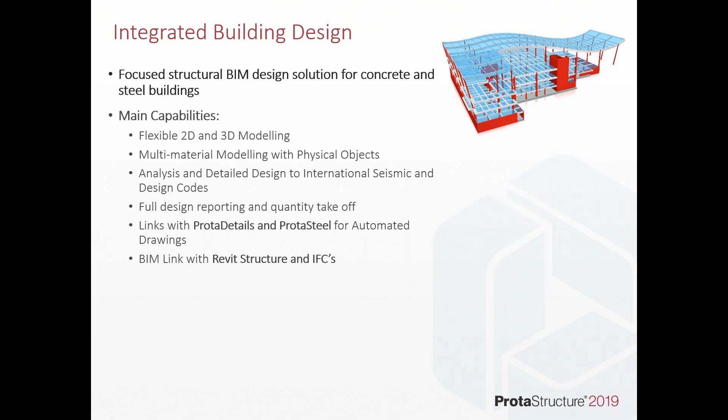Now today I'm going to take you through this brand new release of Prota 2019. Just before I start that, a little bit about this platform. Prota is really a structural BIM solution for concrete and steel building design. We work with physical objects to quickly create models, and then we automate the design of those to a wide range of different codes of practice. From the design, we then produce all the documentation automatically, so that goes from drawings down to calculation documentation, right through to producing BIM models that can be communicated with other platforms, including Revit and other programs that are involved with delivering BIM projects.

Our users like the platform, and often we get comments that it's very easy to use. But our key aim with the software is to help you become more productive and more profitable in how you deliver your projects, whilst retaining quality and professionalism at each stage. So enough of talking about this. Let's get into it, and I'm going to show you how this works.

So I'm going to come in and launch Prota 2019. And today I'm going to take you through a little bit about the software. So for those people who are new to Prota Structure, you'll get a feel for what we do within the platform. But I'm also going to touch on some of the new functionality that we've introduced with this release. Now, if you're new to the platform, there's quick start guides. We've got a lot of YouTube type video content available that you can watch now.

We regularly update the software and they're all delivered live. When you start the platform, you can start in a number of ways. Now, I'm going to just create a project here, and we might just call this Prota Global 1, and I can hit OK. And when we do start, we've studied different markets around the world, and we understand how you go about delivering projects in each of these markets.

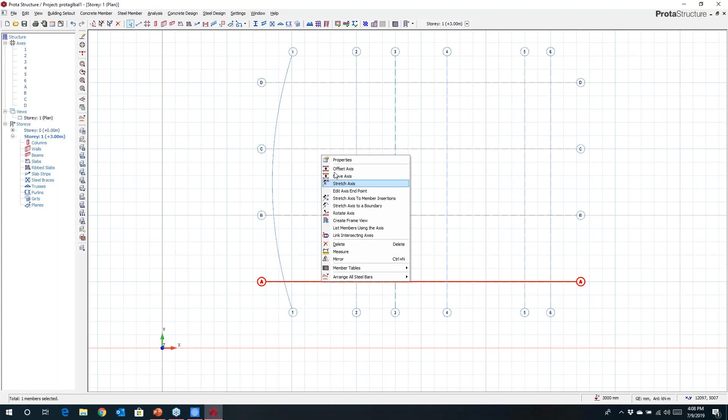These can be done. If you have grid lines which are unusual in set out, we see a lot of buildings these days which are not particularly regular. Maybe you've got a funny facade that the architect has come up with, and you want to create that, then you can use these grid lines to set out whatever type of unusual geometry that you might want to create. Once you're happy with this, if you just right click, you can create that geometry.

And all the modeling is dynamic, and I can just work my way from left to right here. I'm going to start by placing some columns here. I can box around to place columns quickly. If I have columns which are perhaps orientated a little bit differently, these can be set out, okay? And maybe I'd like to just place those along the curvature of that grid. They can easily be defined.

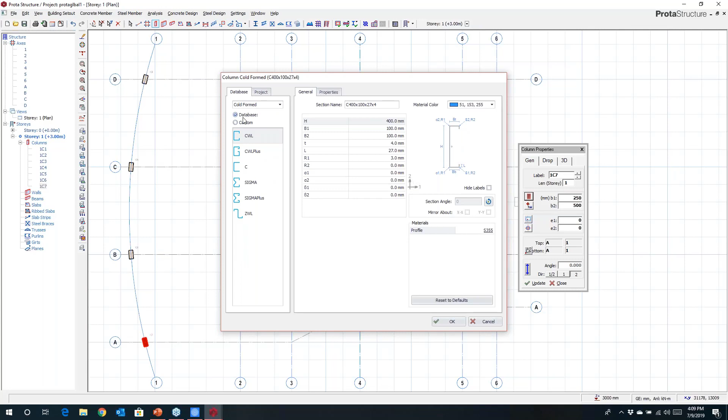Now we have libraries which will cover other types of profiles, common profiles that you might want to regularly use in buildings. They can be concrete, steel, different libraries here are set up that you can draw from. Maybe you've got built-up sections. Perhaps you have cold formed sections, and you can use a database, or you can create your own custom form sections. You can even develop composite sections where you have maybe steel encased in concrete.

So in here, I might want to use, say, a circular column. I can key the properties in. Underlying this, we calculate all the engineering properties for you, but then you can just grab this and start to use it within your model. So I can just box around here, and we can quickly create the objects in the model. I'm going to place some walls here, so again I can just click to insert these quickly.

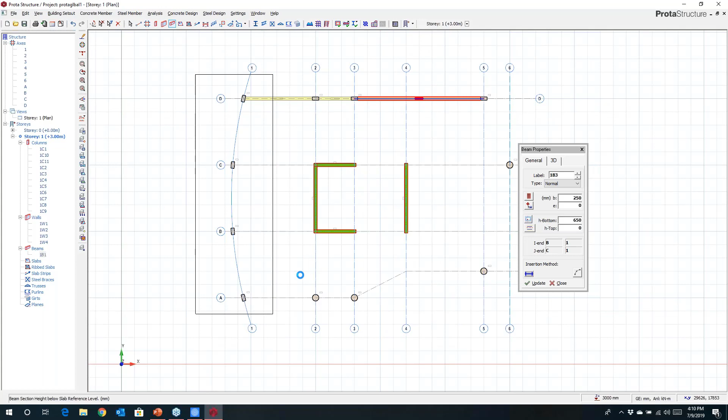Maybe at the same time I also want to create some beams. So again we can just use this to box around. We can feed the properties in, and then they can be created here. So I might create those curved beams. If I want to just snap to points there, I can come in here. Maybe this beam's going to crank and follow the curvature of that grid. Maybe I'd like to actually come in and create a curved beam. So all this is dynamic, and you can create this as you go.

If I have a lot of beams in a certain area, I don't have to go and click them one by one. I can just box around and they'll be created. We don't have to worry about overlapping. We understand that physical objects exist here, and when I pull these beams through, it's just putting the 2 extra beams at each end. Now for secondary members, you can just handily snap to points to quickly create them.

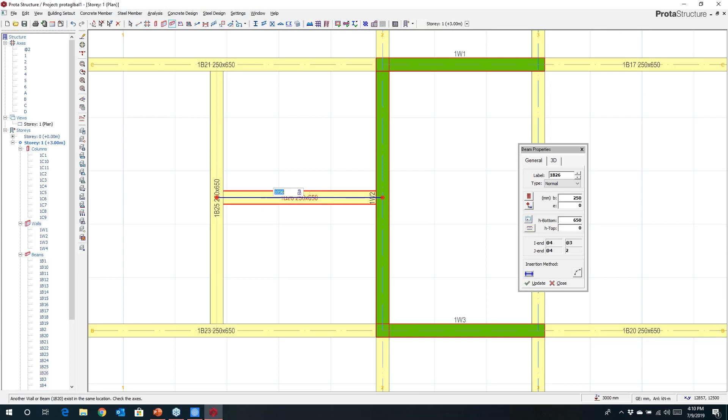If I want to put in beams at quarter point, third point, mid span, I can snap to these points. If I hit F2, I can type a particular distance in, and we'll pick up the exact locations there and other handy points. Now you can use your cursor keys just to move things around if you just want to adjust things quickly against, say, the architectural drawing.

That can be done. Maybe if I come down here, perhaps these columns at the moment might be sticking out the side of the building and I just want to reposition them. It's easy just to create this. You may even have situations where perhaps I want to fix the position of a beam. So we can use anchors here to do that. Later on, if you decide in the project that you might want to make a change here, perhaps the beam width has to increase, that anchor positions that beam in place and you can make adjustments. So that's very useful if you're just wanting to set things in place.

Now, before I put my slabs in, we actually have what we call load libraries here. We can use these to help develop finishes on a building very quickly. If I've got, say, a bedroom and maybe a bathroom, and I want to very quickly develop the way in which these are loaded, I can come in here and choose different colours to represent things. For, say, the bedroom, I'd like to key in the finishes. Maybe I have a screed on top of the floor. On top of this, maybe I have a parquet floor. I can key in the properties here, and the self weight of this is automatically calculated for us.

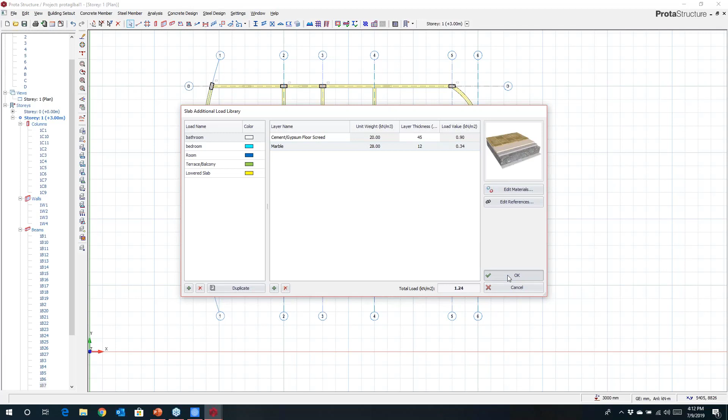Now we can have libraries of different finishes that we might want to typically use for both slabs and walls, and we can build up these loads. If I go to the bathroom, the screed thickness might be a little bit thicker. Perhaps on top of this I've got a marble flooring. Again, we can define these and that self weight's calculated. Now the advantage with this approach is that later on, if the architect changes his mind, which often happens, you can just come in and edit this. Everything within the building can update. You don't have to go and individually tackle changing 500 slabs if he's changed his mind.

So when we come to define slabs, we can just come in and choose from the finishes here. So I'm going to grab, say, the bedroom. If I'm not sure about the live loading, this just links to the code, and we can just choose those values, and then we can place our slabs in the building. Okay. I may have my bathroom. Maybe in this situation, I just want to key the live load in. I can easily do that. So we can just run around and create that. Of course, you can key any of your own finish values in as well. We're not constraining you. It's entirely up to you what values you would like to use here. So I can just run around the edge here, and we can place those elements within the model.

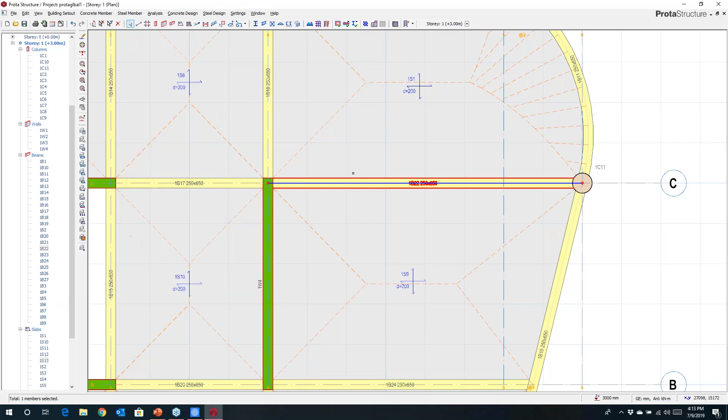Now, what you may notice here is that we've automatically worked out the yield line here. If we right-click on a member and come to edit member loads, you can see the distribution of dead and live load. All this is being automated for you. You don't need to worry about calculating this yourself. If you do want to use other distributions, maybe you want to mesh the slab and use a finite element distribution here, you can. This very accurately transfers the weight from the slab to the frame members for you.

Now, if you have other shapes, maybe I've got an unusual balcony, maybe the architect wants to define something a bit freeform, we can use sketch lines to help create these. Okay, we can then come in and use those. Maybe I want to grab the properties of that slab and put a slab in, maybe it's 150 thick and I'd like to drop it 100.

Okay, we can just come in here and take advantage of that to define that unusual shape. Now, before we get too far on this project, and you might just see that this is starting to look like a key plan, we can start to interrogate things.

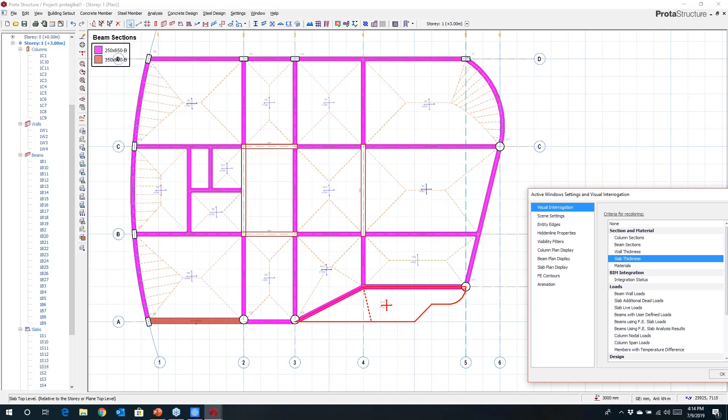So I'm going to look here. I maybe want to look at what column sections I've used in my model. Maybe I want to check what beam sizes I have, and you can see I've used a couple of beams so far. My slab thicknesses, again, we can just review this. I may also want to look at the loading that I've applied. So my superimposed dead load, my live load, all this we can interrogate before we get too far on the project. Okay. So if I'd just like to quickly review things before I get too far on, that's easily done.

Now I'm just going to touch on a few of the more advanced things that we have in here, just to give you an idea of the flexibility that the system has. So I'm going to move into my columns here. I've maybe traditionally just used a standard shape here, but maybe the architect's got something a bit more challenging, and I want to create a different type of column section. I can come and sketch this out. Okay. In the software now, we can automatically contain these types of shapes, and it will propose to you an arrangement of bars. All these you can work with.

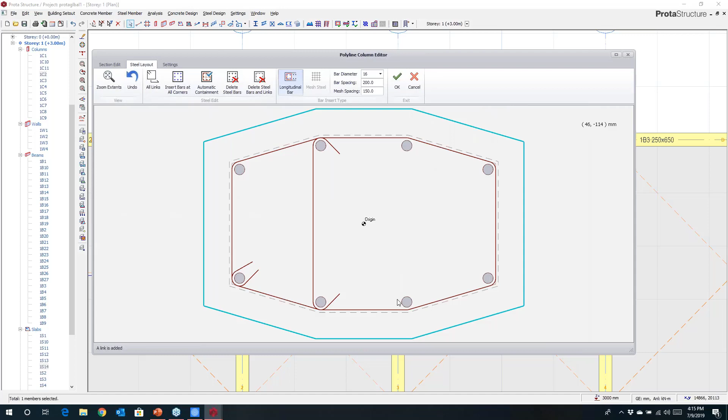So if I decide that maybe for this column shape, I actually want to create some additional containment steel, I want to use this as a template for my design, I can run around here and just come in and create. So if I wanted to add some extra bars here, okay, around the perimeter there, maybe I've got some perimeter bars I want to add in, okay. We can take advantage of driving containment for any shape column we like, and we can then use this as a template for the design and detailing. So if I hit OK, that's then set up. We can then use that for design.

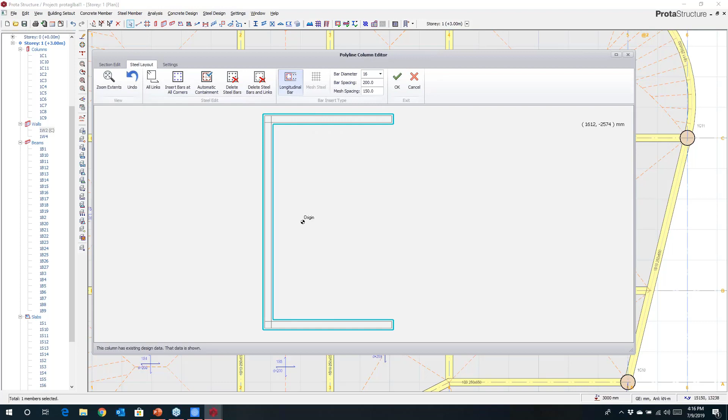Now, we can also do the same thing with the walls. In fact, we can come and merge these, and if we right-click, we can go back to Polyline Column Editor, and you can see here that I've got now that wall profile. Now we've merged these walls into individual panels, and again, we can ask the program to automatically try and contain this for us. And you can see here it's automatically providing all the containment reinforcement around the corners. It will provide the detailing in here.

If you want to add extra ties and so on in here, you can. It's entirely up to you. Okay, and you can use this for then design and detailing. It's up to you. If you don't want to do that, of course, you can just design them individually. The choice is yours as the designer.

Now you'll see here that I've been creating a model in plan. At this point in time, I may want to just come and show you this in 3D. You can look at the view here of the model within 3D, and I can look at different views, and I can tile as many windows as I like to look at different parts of the model here.

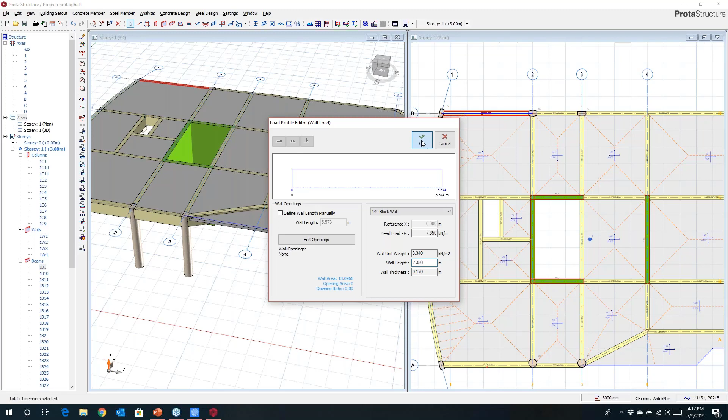Okay. Now, at this point, I might want to come in and start to assign some other types of loads to the building. I'm going to put in some brick wall loading. So again, I can draw from a library, a little bit like the slabs, where we can set up different types of brickwork, and we can type in the height of that, and then that loading is automatically created on the beam. Now I can copy this loading, and we can replicate this easily around the edge of the building. So if I just copy this externally around this, if I right-click, we can then paste these to these other members, and you can see here that brick wall load is automatically set up.

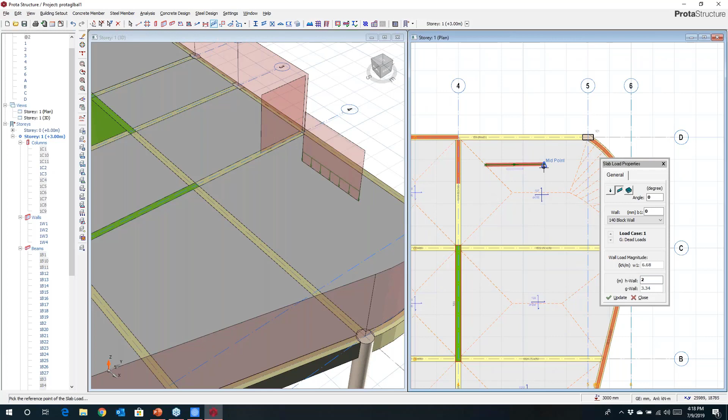I may have other types of loads that I want to assign. Perhaps I do have a wall load sitting on top of the slab. So again, we can just key in the properties here, okay, and we can come and define that in the model. So if I wanted to place a wall directly on top of the slab, you can see these have also been created at the same time.

Within a building, you'll have things like services running around, and you may want to create and position different openings to cater for those. The beauty with working with a physical model is that they can easily be adapted. So if I pick this up, I can move this around, I can place this wherever I like.

If you have other types of set downs, perhaps you've got a bathroom, or maybe you've got part of the building which is a little bit different, you can just come in and create this. So if I just decided that in here I wanted to create a drop in the slab, I can easily come and define that within the model.

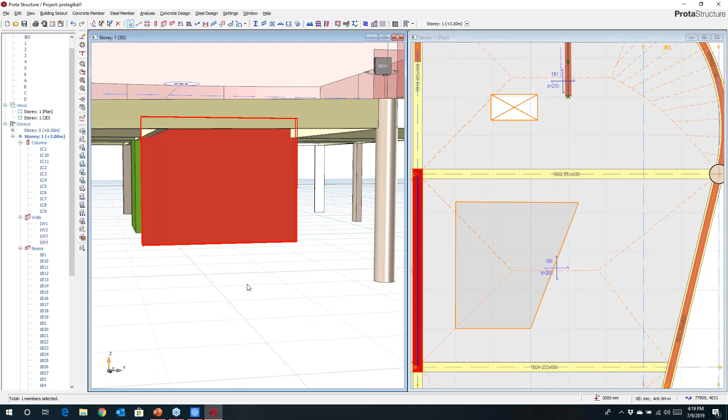Last thing I'll touch on here is if I come to the walls here, similarly, if I right-click, we can come in and insert openings in here. Maybe I have a window. I could even put the weight of glass in, depending on how accurate I want to be. All this can be considered within the model. So that just gives you an idea. I've just created a simple floor.

At this point in time, I may want to take this, and I'm going to just come in and insert some floors. So let's just say this is a 5-story high building. Okay, and I'm going to take that floor and I'm going to come and generate this information up. So I'm going to copy that up a few stories there, and you'll see that this is just replicating up the building. Okay. Now once you've got this in, it's all editable.

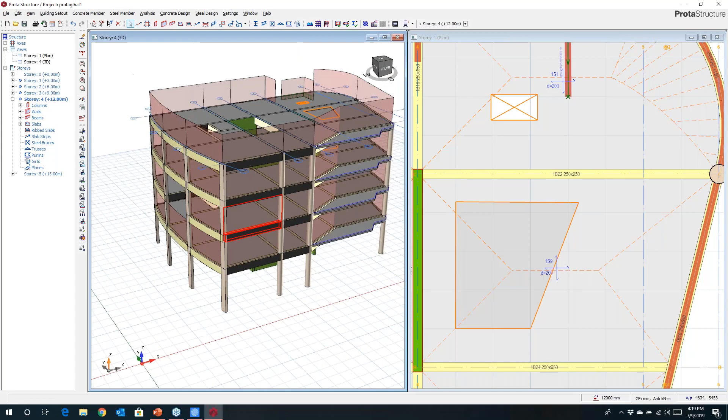So if I want to make changes as I go, perhaps I'd like to remove those beams there, I can. Maybe I'd like to reconsider the structural system at the top here. I'm just going to come in and grab all the beams. So if I just come in and use the filter button there, I can select all the beam members there at the roof, and I might get rid of those, and we might want to work with a flat slab. So you can see that I've just quickly changed that from a beam slab system into a flat plate. Okay, it's easy just to come and adapt and modify the model.

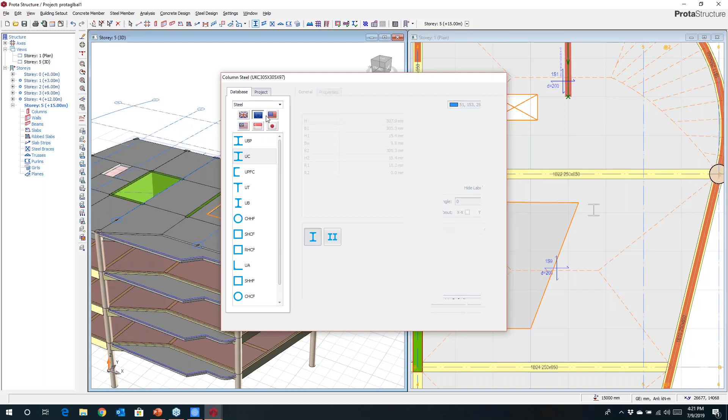At the roof here, I'm just going to touch on some of the new features that we've got with steel modelling. So when you come to create steel elements, you have libraries here of different sections, and there's a broad range of different sectional databases you can choose from. I may want to use a UC column, and I can just grab something that I might want to start with, and then we can place this within the model. Okay, so you can model in either 2D or, as I am doing here, position things in 3D, and you can see that those columns are quickly created.

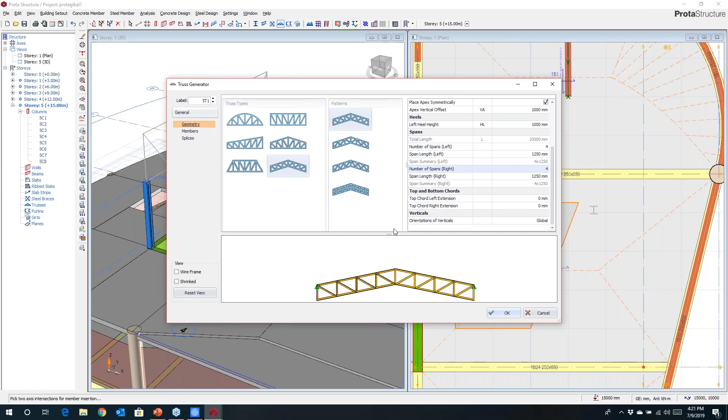At this point, maybe I want to come in and create some trusses. So again, I can just snap to points within the model, and you can then come and preview different truss shapes. So you can come and choose the appropriate type of truss that you might want to work with. Okay, these can be aligned the way in which you like. You can easily come and adapt these. So if I want to have 4 bays each end, or different truss configurations, I can.

The members are grouped, so it then becomes easy to edit. So in this situation here, I've got diagonals there. Maybe I want to change these to tubular or square, or maybe channel sections, I can. If I want to use back-to-back angles, I can also do that. So it's easy just to come and adapt and make changes globally to those elements within those groups, and they're set.

If I just remove the verticals there, this makes the placement of that easy. I can also set up splice positions as well for the connection design. So if I hit OK, that truss then is created. That then becomes available for me to use elsewhere. So I can easily grab this and copy this across the structure.

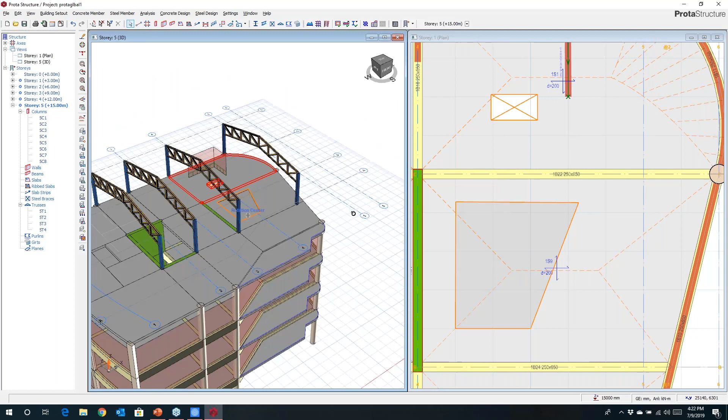I can then start to just work on this roof level. So I'm going to also place at the same time some beams. Let's just grab a beam section to start with, and then I can choose fixities and so on within the beam. I don't need to draw them one by one. We know that the columns are there. The beams will be automatically split as I draw these. Okay, and there you can see that those beams are created.

Now you'll notice here that the snap points are dynamic, and you can snap to any part of the model that you like here. So I'm just going to come in and tie these frames together. Let's just tie these beams together at the top, frames together at the top, and they're done.

I'm also going to place in this model my purlins. So let's just grab the 2 end bays here, and you can see here that it's proposed an arrangement for the purlins. Okay, it's set these up at nodal points, intersections with the truss. So it's trying to use some intelligence with how it does this. You can adapt this if you wish.

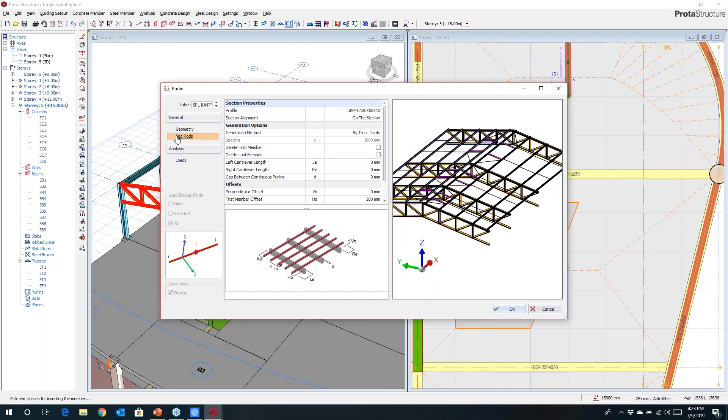What you might notice with this version is that we also can model the joists or the sag rods, and if you don't want to have these in, they can be removed. You can also assign loads to this. You can change member sizes if you want to use different sections in here. These can be adapted at starting point. And if you just hit OK, then that will be created in the model.

Now, I can also click on elements. So if I wish to create between those 2 columns, maybe I'd like to set up a brace. You can just choose these elements here, and then you can see that a brace is proposed for you. Now there's different types of braces in here that you can choose from. You can just come and set this up to suit. So it could be a diagonal brace or maybe even a K-brace, it's up to you.

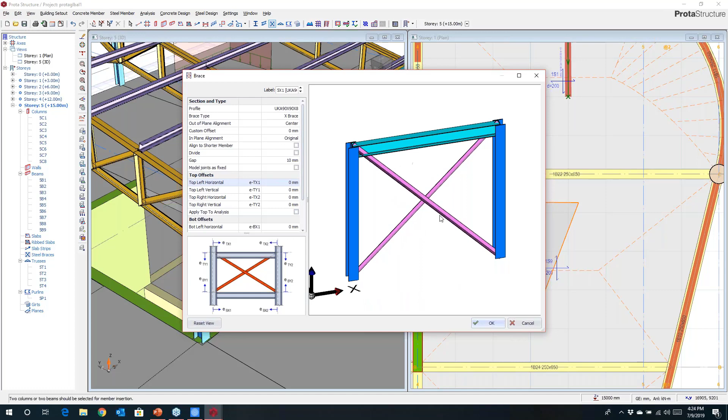Now the bracing positions can be manipulated. If you wanted to move a brace by 500 or so on, you can see there that the analytical wire is kept where it is. If you don't want that, if you want it to align with the new position, that can easily be adapted here. If you want to make any adjustments here, these are dynamic, and you'll preview what we're going to create before we create it. So if I hit OK, that can get built.

You can model in different planes. I'm modeling in the plane of the roof there. We can easily come and create these. If you want to click on different elements here, these can be easily set up. Now I'm going to just finish this off. Let's just place my girts. And again, I can key in the spacings here. If I don't want to see sag rods, these can be turned off. And then if I hit OK, then my girts will be created here.

And the last thing I'm going to do here, let's just place these external ones on this side as well. I could put the internal ones as well if that's what I'd like to do. So at this point in time, let me just save the model before we move on. Now, the important thing with what I've done here is that the purlins are sitting directly on top of the truss. The girts are on the face of the column. The bracing's in the plane of the column.

So what we're doing here is we're setting out things to suit the way that this may be constructed and fabricated. Now that's very important when working with ProtaStructure, because at the end of the day, what we want to create from this is detailed documentation, all the drawings and all the detailed design we want to drive from this physical model. So at this point in time, I'm going to now move into looking at the analysis and design.

When we select the analysis button, you can see here that a range of codes is presented. In this release, we have introduced the American codes of practice. So you've got ACI code. There's also other international codes available: British standards, Eurocodes, Turkish standards, Hong Kong, Singapore, and there's other localizations in there that you can choose from.

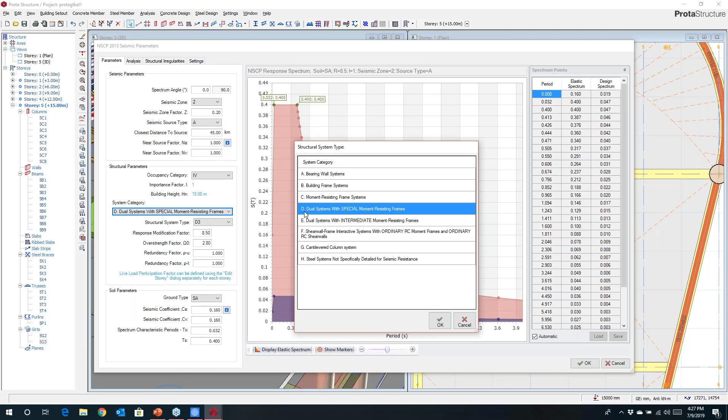So I'm going to look at the seismic parameters here for this building. In here I can come and choose my seismic zone. It could be zone 2. This is in the Philippines. Seismic sources can be identified. We can also come and choose occupancy categories. This just follows the code. You'll just choose what type of structural system you're using. I might be using a dual system with a special moment resisting frame.

I can also choose the type of frame. It might be composite steel and concrete, concentric braced frames. Response coefficients, overstrength factors will all be assigned here, automatically done for you. You can also choose your soil types depending on where you are, and if it's a soft soil, you can see that this is adapting. The spectral curve will adapt to suit those soil profiles. Now, of course, if you have your own data, if you want to type it in, create it yourself, this can easily be done.

Now, I can choose a number of modes I want to run. Damping coefficients can be applied. Eccentricities are automatically worked out. We also do some quite sophisticated checks to check for irregularities. And these can be very tedious if you have to do them by hand, but torsional irregularities and elevation irregularities are all checked by the software, and we will automatically make modifications to the analysis should these exist.

In addition, we're also doing some very detailed seismic checks. So we will check for wall frame interaction, second order effects. We will check for strong column, weak beam, and we will also get into the detail of checking joint shears. Now, if you've done that, like I remember as a graduate engineer in New Zealand, it's a very tedious process and very time consuming to make sure all those bars fit. So we will perform all these checks automatically for you, and there'll be detailed documentation provided with that.

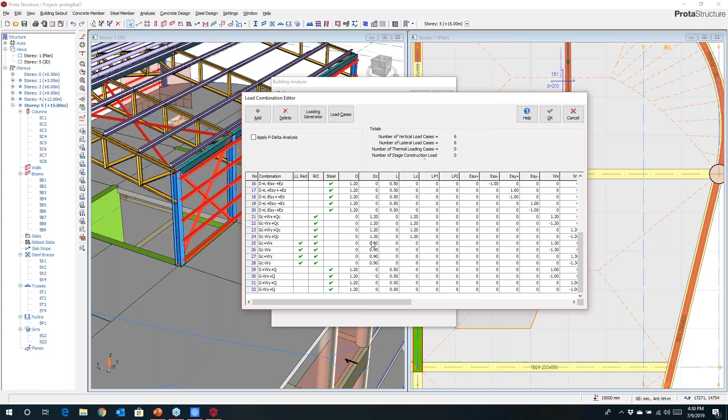So if I hit OK, all the combinations will automatically be set up for me. These factors can be edited. You can make changes in here if you wish. If I hit OK, then they're done. Now, we also introduced automated wind loading in this version, so you can key in basic wind speeds.

We will automatically populate different data, the geometrical data, into this. You can choose different exposure categories, and roughness can be set up to suit. This is following the American standard, but you also have British and Australian codes. We also have European standards in here as well. We will then automatically work out the pressures as well as the loadings being applied. They just get applied to the structure and they're automatically set up for you.

Now you can customize material bars and grades to suit the way you want to deliver the project. So if I don't want to use certain bar sizes for certain elements, these can be customized. You can set up different grades of steel and concrete here just to suit the project. So all this is customizable, and you'll do this when you're getting a job established.

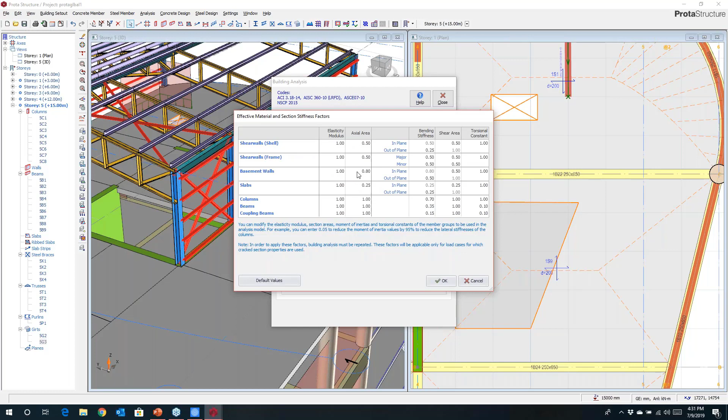Now the cracked section properties are highlighted here. You can define different properties for both shell and frame shear walls. We have a new basement wall object which can have different crack section properties from shear walls. We've also introduced coupling beams, and you can also play with these properties if you wish. So if I hit OK, they're set up.

Now I'm going to move into run this now, and I'm going to use rigid zones. I'm going to actually build out rigid arms within my beam column joints. I can also choose to mesh my walls, and you can define different meshing parameters here. I can also choose to mesh different floors within this building. Now I had a flat slab at the roof there. This roof level, I'm going to choose to mesh that, and I can play with the parameters there, and the stiffness parameters, semi-rigid membrane and so on can be set up here.

Now the analysis is just a button, and at this point in time I can just hit go, and what we're doing now is that we are going to take this physical model and automatically build the underlying intelligent analytical wire. So as I've been going, I can assign different fixities to members. I've set up my load combinations. The load distribution is automatically being performed. And then we can move in and take this and build the analytical model.

Within this version of the software, we've introduced a new 64-bit enhanced solver, and this allows us to run much larger projects much faster. You'll see this is just about to kick off, and we're now running through the analysis process. You can see here as it's progressing through different stages, these are all documented, so you can see how this is going. We will do checks, so you might realize when I created this model, I actually have a column sitting on top of the slab. We'll interrogate the model, make sure that everything's okay, that there aren't any issues, and then we will carry on with the design. It's now prepared all the data.

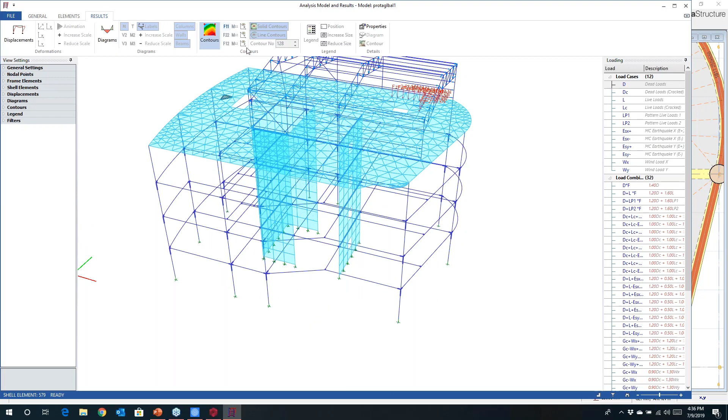So if I look at the model here, we can selectively choose what we want to mesh in the building, which is what I did, and I can come and choose to look at these different contours here. You can see contours, and you can start to look at different forces in the model. So if I wanted to look at, say, axial load, and I'd like to know how these loads are changing as I'm going up the building, this can easily be reviewed. You can filter out different parts of the model.

If I just like to look at perhaps a particular floor, maybe it's story 2, and I want to look at that in a bit more detail, I can just highlight that, and maybe in here I'd like to look at the shear, or perhaps I'd like to look at the bending. All this can be interrogated within the model. I may even want to be looking at seismic load cases just by themselves, or as part of combinations. They can all be easily reviewed here, and we can interrogate these.

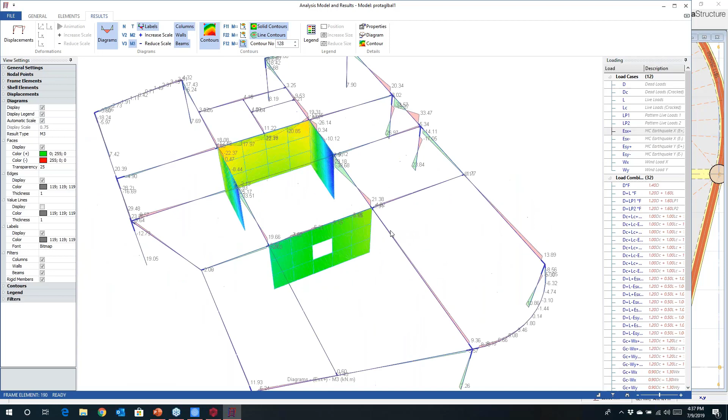Now, we do make use of rigid zones, and you'll see that we've actually built out rigid arms from the beam column joints here, and these allow us to look at more efficient design. We're more accurately looking at the stiffness of the beam column joints and frame interactions, and this will then lead to a more economical design and approach to your frames. So if I'm happy with that, we can then move in and look at the design of the structure here.

I can just click on a column, and we can look at detailed checks for this column. It will highlight to you what is critical. In this case, it's actually just a gravity case. We can look at interaction diagrams, so we can see capacity plots here. Axial limits, seismic limits, and so on will be specified, and you can see the interaction diagrams. You can also look in detail. We will iterate to work out the neutral axis. We'll work out the most efficient way in which the structure can be designed, and that will all be documented.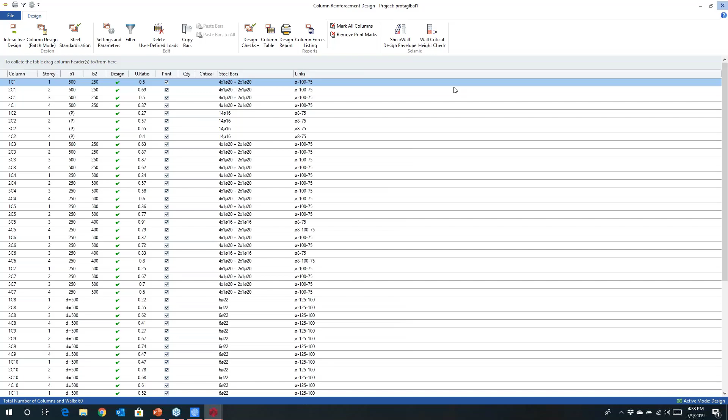Similarly with our beams, if I just click on a beam, we can just come in and look at this in more detail, and we can look at the arrangements here. We will automatically select the arrangements. You can look at diagrams here. What we have done with this release is that there's these new diagrams which are dynamic, and you can see I'm looking here at the shear force and bending moment diagrams.

If I'd like to look in more detail, let's say my deflection plots, I can. These are the envelopes. If I wanted to look at dead load cases, or perhaps my seismic cases, or perhaps different combinations, you can just easily navigate through these, and these will adjust. And obviously we're then enveloping these for the design. Now with the new enveloping, this provides for much faster grouping design, as well as general enveloping. It also allows us to interrogate diagrams much more closely.

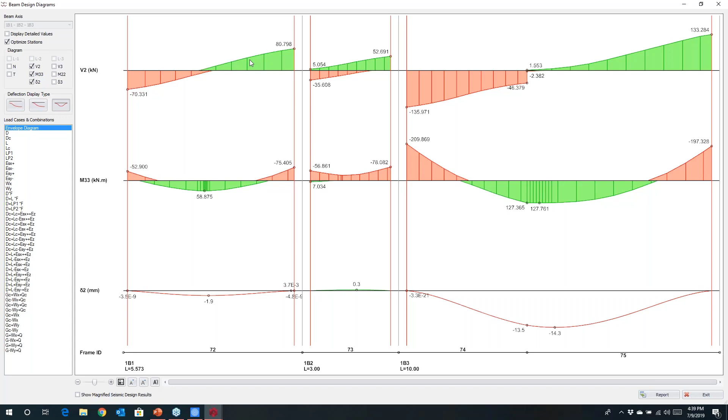An example of that, maybe I want to look at the torsional forces along that member, I can just highlight that, and we can come and have a look at those in more detail if we wish. Now, you might also notice there's intelligent design stations there, and they are useful when we get into looking at other aspects of design.

Now, if I make changes here, you might see that instantly we're checking this. So when I make that change, the design's live, and things here will adapt accordingly. That wasn't adequate, didn't pass the code, and I made that adjustment, and then that's okay. So all my beams in this structure are designed.

Similarly, I can come up to look at the steelwork, and we can choose steel elements here. We can go to steel member design. If I just ask it to check, I didn't go through and design all the steels in one go just before, but I can perform the checks here.

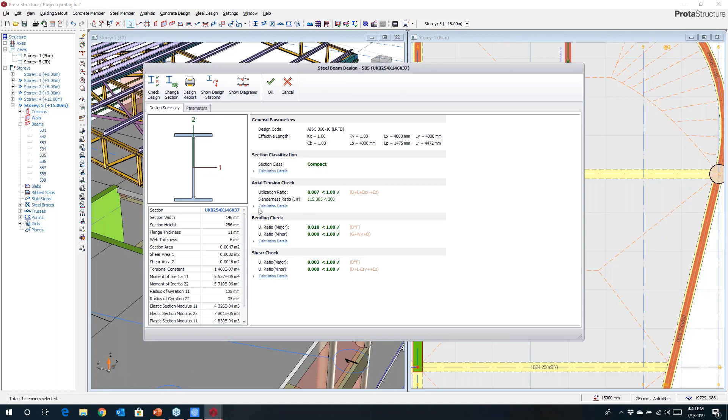Okay, you can look at detailed checks here of all the members, bending, tension, shear, all the classifications will be done. And again, we can look at the diagrams for that member. Now, those design stations I was talking about are very important for steelwork. We will intelligently track the bending moment diagrams in this release, and we will work out effective lengths automatically for checks such as lateral torsional buckling.

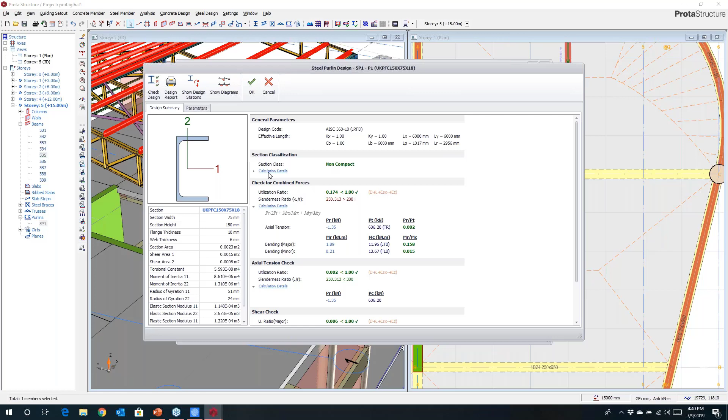Okay. Now, these checks can be for, say, a beam. They could be, in this example, maybe it's for purlins. Now again, they're all grouped, and you can come and look at the design checks for these. Again, you can look at combined checks, tension checks, and so on. They're all clearly documented here. And again, you can interrogate the diagrams like I did earlier if you wish.

Similarly with things like trusses, again, you can come and interrogate these. Okay, we will check them. So if I want to check the chords, we are calculating automatically the effective lengths, and we're also looking at the length that chord might be in compression for the effective length calculations. All this is automatically done by the software. We've got a degree of intelligence here in how we're performing the design.

Now I've done the main superstructure. I may just want to, at this point, move down to look at the foundations. So if I just grab these, I'm going to come and insert some foundations. I'm going to work with some pile caps, and in here I can then move in and start to look at the foundation design. So with this release, we've done a lot of work on enhancing the foundations. You can put in the allowable working load.

If you hit OK, we can then batch design these, and then all in one go, our pile caps are designed. Now we can group these. It will find pile caps which are similar in size and similar in number, and if we hit OK, then those groups will be set up here. Okay, now if we do select a particular pile cap, if we want to look at this in more detail, we can interrogate this more closely. And we can see the pile cap here.

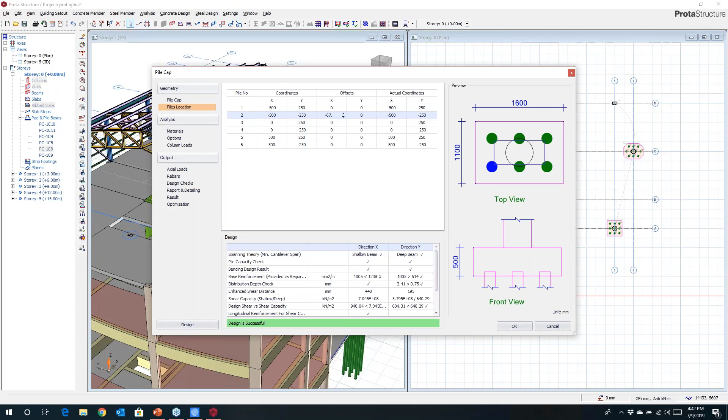These locations are all editable, so if I find on site that piles may have moved out of position from what was originally proposed, we can key in those new positions, and we will instantly check this to make sure that this is okay. And we can then produce the as-builts for those pile groups. I might just run around and show you a couple more foundation types before we start to get into looking at the documentation. Okay, I'm going to key in a thickness for my pad bases.

These are automatically designed. You can choose square footings. These can also be slightly eccentric, so you can play with things. If things are close to the boundary, then they can easily be set up here. Similarly, I may want to introduce a raft, or maybe I'd like to place beams in here. I can just key in. Maybe I'd like to put in a strip footing. So we do that just by placing a beam in here, and we can insert strip footings.

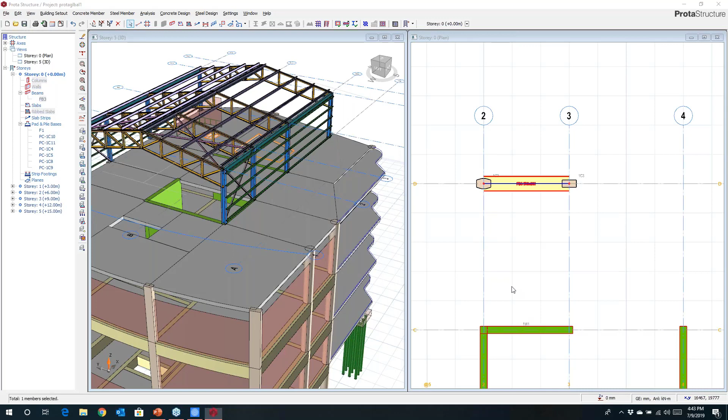These can be slightly eccentric if you wish, and then we can take these and design them. So the software will take all the loadings automatically from the analysis results, and then these can be designed in here. So if we hit OK, they'll be set up, and you can see there that quickly I've not just created the pile caps, but also a strip footing. I've also set up and created a pad base there.

Now, there's other types of foundation systems that you can employ in the model. I'm not going to go into these in too much detail in this presentation. We do have other presentations that are going to follow this, which will focus on particular topics. But if I wish to put in a raft in the model, or maybe I want to insert a pile raft, these can easily be defined. And you can set these up to suit what it is that you're wanting to consider within the project.

Okay, so for this, I'll just show you how pile rafts work. You can choose an arrangement, and then the piles will be built into the raft here. These are editable. If you do decide that you wish to make changes as you go, these can be adapted. The piles also have individual properties, and these can be relocated and moved.

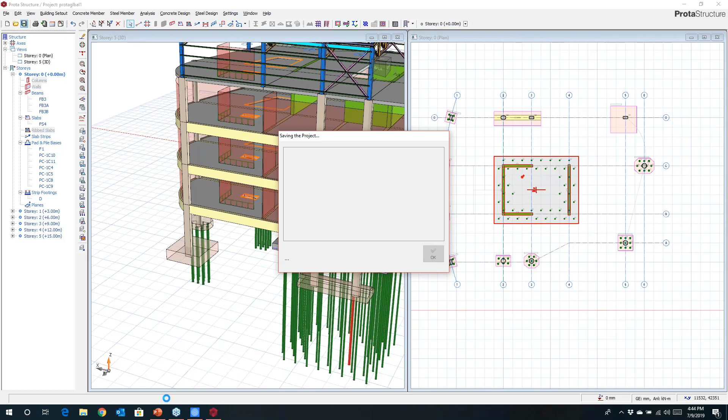Sizes and properties can be adapted to suit the project that you're working on. Okay, so this gives you an idea about the basics of Prota Structure. At this point, I'm going to just summarize where we're at with Prota Structure, and I'm just going to give you some background on what's new or what's been introduced with this release.

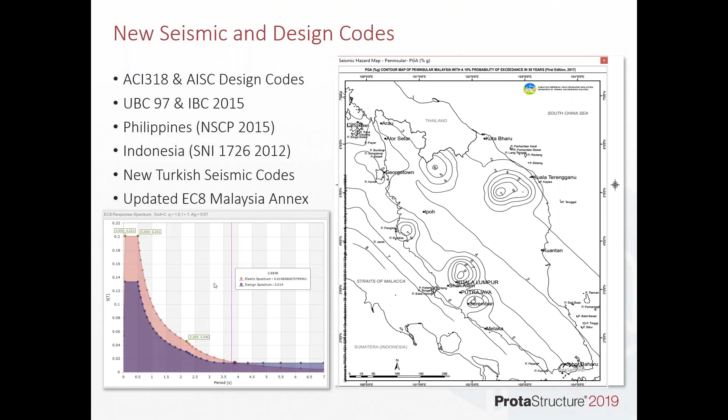Obviously, I mentioned that we've got the new American codes that have come in, and this is a very comprehensive implementation of the American standards, both in terms of design as well as in terms of seismic design and detailing as well. And we've also introduced localizations to suit particular markets, especially in the Philippines and Indonesia, where they have their own standards. Turkish standards have also gone through a comprehensive upgrade recently. It's probably now the leading or the newest seismic code available globally, and that's also been fully incorporated with this release. For those users in Malaysia, we have also updated the Eurocode 8 to incorporate the latest Malaysian national annex.

We have introduced the wind loading, as I showed you, and this covers a range of codes. We've also introduced these new diagrams where you can see very clearly all the results, and they're adaptable. You can choose what you want to view. You can look at displacements, different values, and these are also enveloped for design.

Steel design, as I mentioned, has been enhanced. We're now looking at design stations. So if you have members framing into different positions, we will automatically work out the effective lengths for you, and detailed checks will be performed. Now look out for auto design and design grouping, which is on the roadmap. You'll start to see that coming through in subsequent updates.

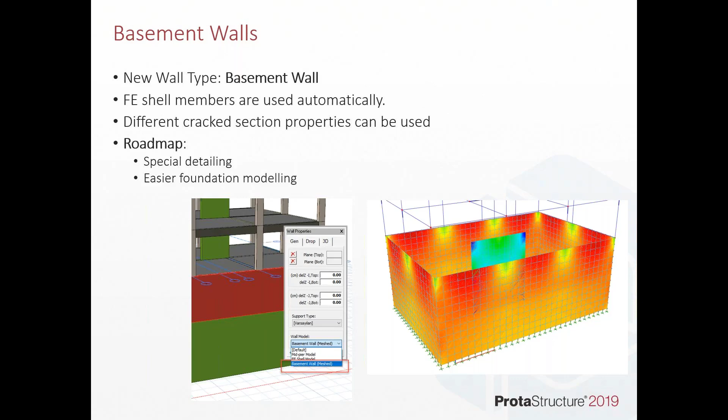Especially for basement wall considerations, we've introduced a new element for basement walls. When you do use this, they'll automatically be meshed, and we will, moving forward, be providing special detailing design provisions for these. Coupling beams have also been introduced. These are very important for use in seismic zones to tie wall frames together. We will look at the interaction of these, and we will also look at the design and detailing of these accordingly.

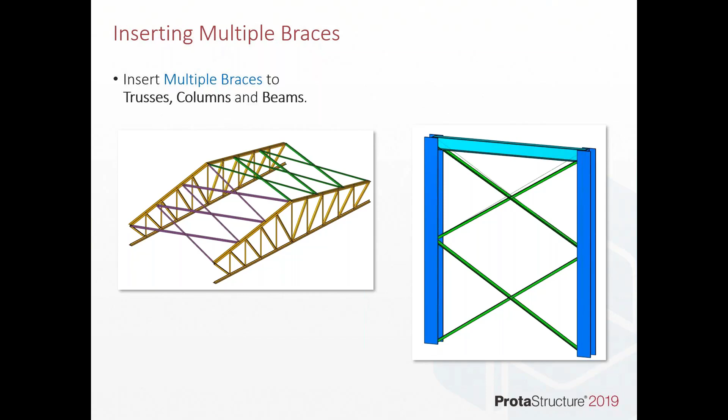For steelwork, we've introduced sag rods to give you more efficient design when dealing with purlins and girts and the like. We're also inserting multiple braces into columns, trusses, beams, top and bottom chords, wherever you like. These can easily be set up now. I did mention that cracked and uncracked section modifiers can be provided, and these can be easily established within the model, and we will run 2 separate analysis runs to cater for the different section properties.

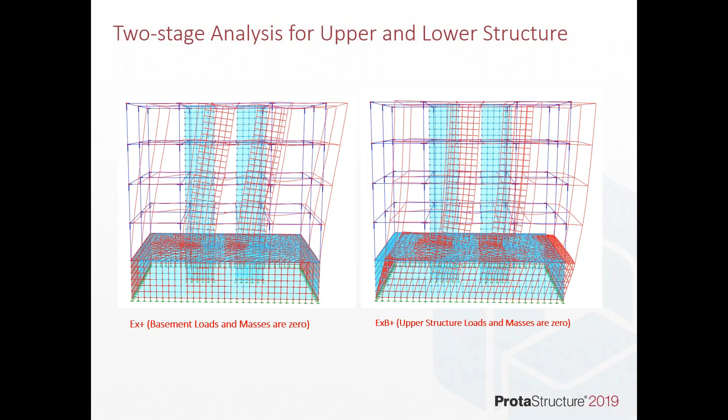For advanced seismic, we are considering basement structures as well, and for basement structures, in accordance with the code, you have to do 2 runs, one with and without masses from either the superstructure or the basement, and these are automatically done in one single run within the software. Generally speaking, with most programs out there, you might have to set up 6 or 7 models to consider this. We've also enhanced the solver, so we have a new 64-bit solver, and this tackles very large projects, which we're seeing, much more quickly and robustly than we have in the past.

So I've come to the point now where I want to start to look at my documentation, and to do that, I'm going to come in and load Prota Details, and you'll just see here that I'm taking this project now, and I'm going to push this into Prota Details to start to document the design. So it's just opening up here. Everything I'm showing you today is live. There's no smoke and mirrors, so I'm just taking you through exactly how the system works to try and cover the basics, but also cover some of the new features.

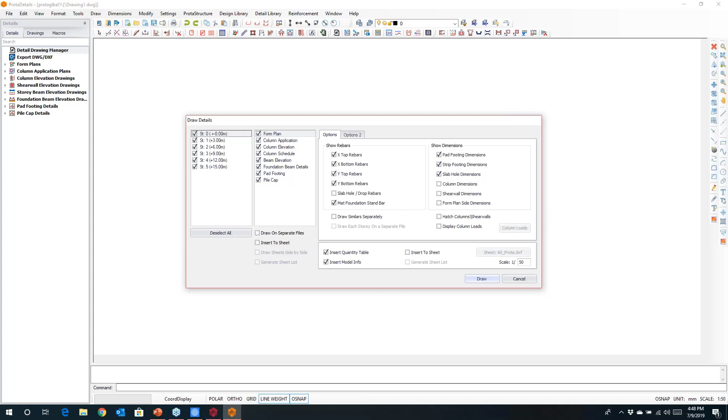When we come in here, the way Prota Details works is that we will just come in and automatically generate information for you. So all the layers and line types you can establish within Prota Structure. It's fully flexible. You can then come in and choose what you want to draw. So I can choose exactly how I want to draw. I'm going to insert these to a sheet.

Okay, I will come here and you can load your own title blocks. They can be your standard company title blocks that can come in. You can choose how these title blocks are referenced, because we're also getting involved with drawing management here. So we will lay your references into the sheets in accordance with what you wish to have.

You can play with scales. You can also choose how you would like certain detailing to be done, truncation, for example, for the beams. All this can be set up in here, and once you're happy, you can then ask the program to come away and start to create this documentation.

So what the system's doing now is it's automatically taking all that design information that we created in Prota Structure, and now starting to lay it out into our sheets. It's systematically looking at how it can go about optimizing the organization of the details into your title blocks, and it's now going to move in and start to arrange these for you. You can see here it's just starting to produce, and there is the outline of a title block. You'll see now it's just going to start to create this for you.

Now, while I'm talking, Prota Details is a complete CAD system, so you can perform full drafting within CAD. You might just see up in the top corner there that this is actually a DWG file. We're working natively in DWG format. You can make changes to this. You can use it as a complete CAD system if that's what you want to do.

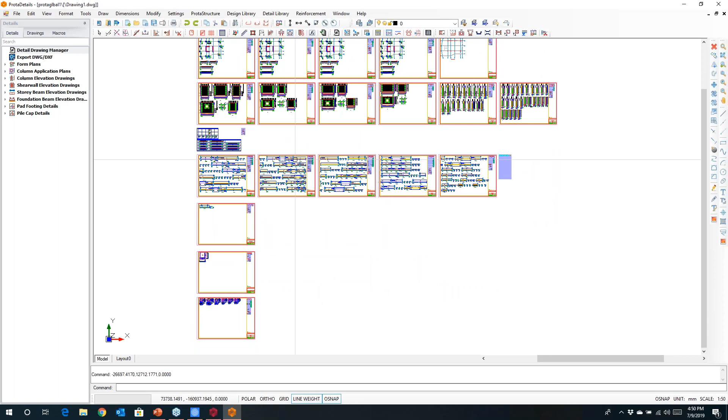Now I've finished and I've produced my drawings, and if I just zoom out, you can see that everything's been created in one shot. So all the drawings, all the details that we wanted to create have been automatically arranged into our sheets, and we can then come in and interrogate these in a bit more detail.

So if I want to see my foundation plans, if I'd like to see my key plans here, you can see the positioning of openings and drops there. If I'd like to look at set out drawings, you can come and view these. Notice that these are all laid out into your sheets, so they'll be exactly in your sheets and exactly detailed the way that you would like them to be produced.

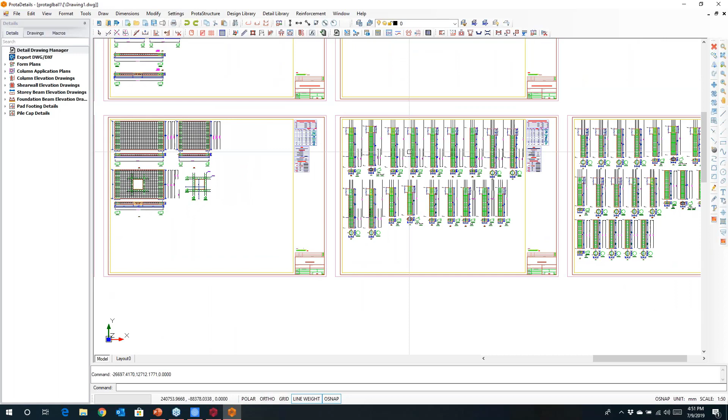If you want to look at elevations of the walls, you'll notice with this release we are also detailing around the openings for walls. You can also look at the column detailing as well. And notice that the confinement zones for seismic detailing are all automatically being detailed in accordance with code. You can see very clearly how these would go about being constructed.

Now, traditionally, in some of our markets, people prefer schedules, and these can be created as well. Even for the schedules, we will automatically look at the details and we will group members where we can. Now, if I come down to the beams here, you'll notice that, again, all the confinement detailing is being done, and you can see how that's being prepared. You can also look at the bars there.

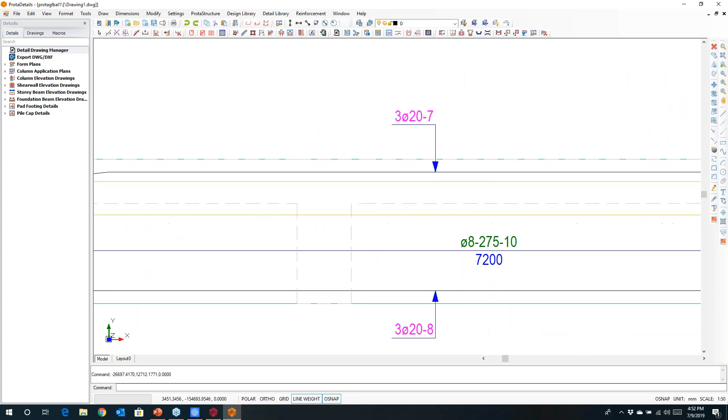If you look at a bar there, you can see that this is positional mark number 7. And if I come over to the side here, you'll notice for this bar, these are actually 20s. There's 3 of them. They're 9.4 meters long, 28.2 meters in total. And you can see the bar bending shapes there. You can also see the full quantity takeoff. So all of this is produced automatically from the model.

Now, there are other ways of presenting information. If you want to see things in a tabular form before you actually start to prepare detailed drawings, maybe you're just going for tender and you just want to provide this preliminary information, that's also available to you.

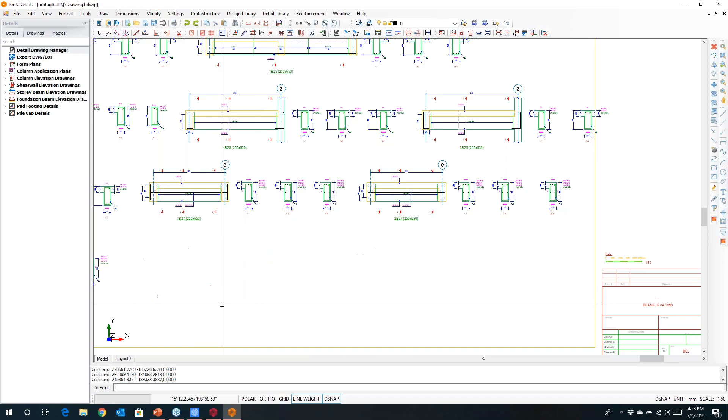You are in CAD, so anything in here is adaptable. So if I decide that I want to move a detail around and reposition it, or perhaps I want to come in and crop a beam, and just cut it and reposition it to suit placement, all this can be done within the software. So in here you have full CAD capabilities as well.

So if we come down to the foundations, you can see the pad footings, the strip footings, pile cap details are all being produced here. Now, the idea around Prota Details is to lay out everything into your sheets. You can work within Prota Details to lay out specifically what you want to see.

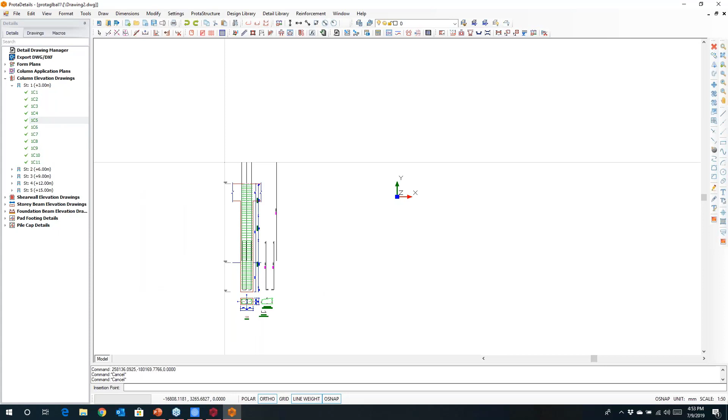So if I decided that in particular I want to look at an elevation of either a single column, or maybe I'd like to see the entire elevation up the building, I can come and draw that. We've introduced precision detailing, so we understand where shapes are changing and the bars will adapt to suit.

You can just selectively choose from the table here what you want to draw and create. So I can just pick certain members and draw them out within the model. I can also within here create and draw my own details. So if I want to use this as a CAD platform and come in here and insert things like bars and the like, I can. And these can be easily positioned within the model.

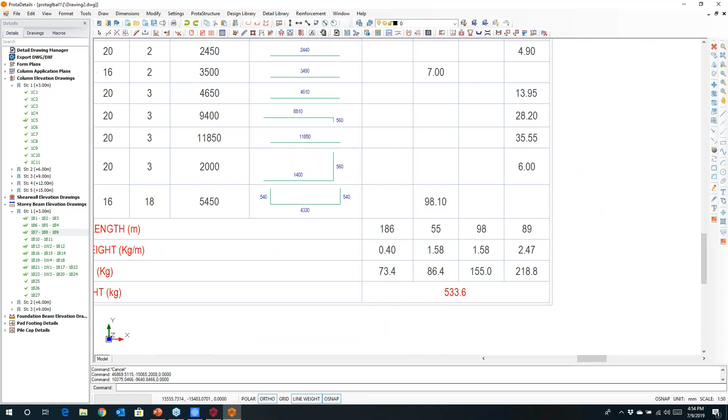Cover and so on, and all that can be specified, and we can use this to quickly create details of our own. Now, if I decide that maybe for this detail here, this is a variation on the project, and I want to provide complete quantities takeoff, instantly we can adapt and calculate that for you. So if you were wanting to put in a claim for a variation on the project, then that can be done.

Now, in addition to this, we also have a comprehensive library of component design. I'm not going to have time to go through this in detail today, but if you're wanting to design things quickly, things like stairs and so on, in here you can specify loadings. We can design these, and then we will produce the drawings for you. So all the documentation will be prepared, and all the design calculations will be done.

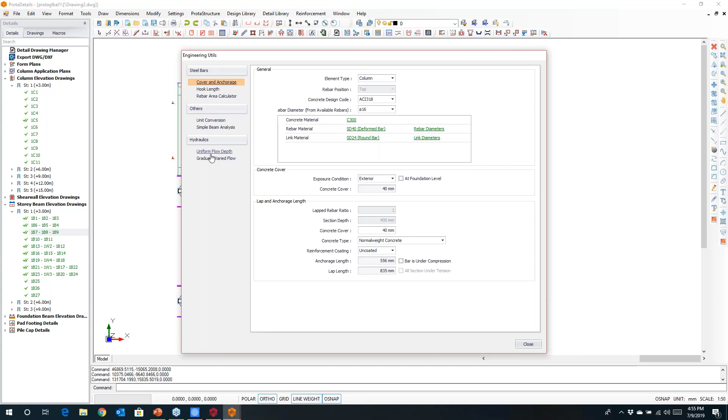Check out our new pile design. This allows you to feed in all the geotechnical properties, and we will calculate the working load as well as perform lateral analysis of the piles. We've also introduced a new engineering utilities library in here, where if you're wanting to know certain things like, say, for a certain bar size to a certain code, what's the bending length, extension length, hook length, area rebar calculators, anchorage length calculators. There's even uniform flow depth calculations and so on in here that you can take advantage of. But primarily we have this comprehensive library of calculations that you can use.

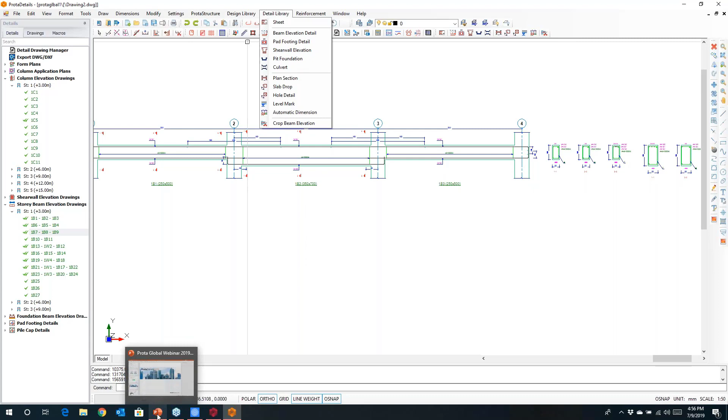We also have a detailed library of calculations here, and we've introduced things like new beam detail capabilities, where if you just wanted to quickly add a few extra spans to a beam and adapt these to suit, you can play with things like dimensions in here. If you just want to quickly use this to draft elements within the structure, we can come in and place that, and then you can use this as a drafting tool. So the idea behind Prota Details is both a design library as well as a comprehensive detail library. So I'm going to stop there, and I'm just going to come back and summarize where we are with Prota Details.

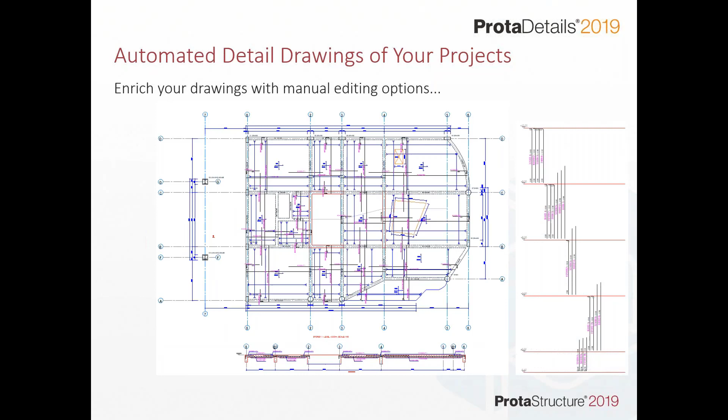So with the 2019 version, we're creating everything in one click. So all the details will automatically be prepared from Prota Structure and documented in full. And that comes with schedules, beam elevations, tables, right down to the foundations, all automatically generated to your preferred drafting standard. You can also enhance drawings. We've introduced slab sections with rebar in this release, and you can also add other details to drawings as you go. So it's all very flexible.

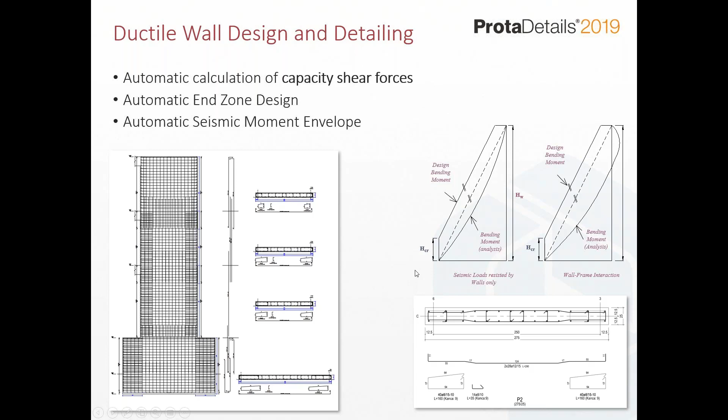We've done a lot of work on enhancing the way in which we go about detailing. So things like openings, column sections which change in size, even sloping elements, beams and columns have all been enhanced significantly over previous releases to give you a much more precise detail with less editing required. Ductile wall design and detailing is very, very powerful, and we will go about detailing this out to suit the seismic provisions and codes. There are new detailing options where you want to crank bars into end zones to give you a better detail. That can also be performed, and we will design the walls based on bending envelopes for seismic.

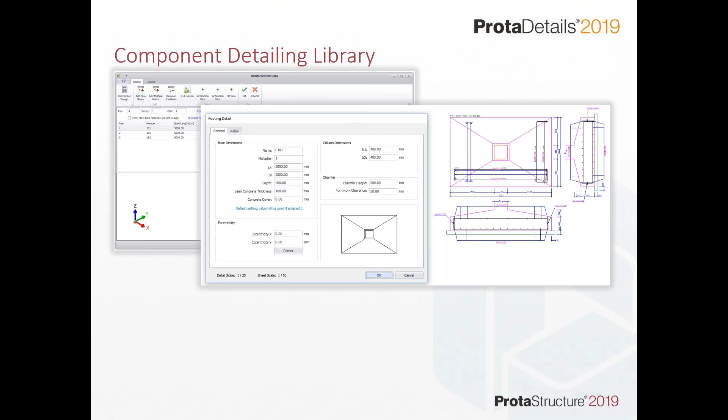The component design library is continuing to develop and evolve. We've done a lot of work on the reinforced concrete retaining wall with this release. You have stairs, corbels, pile design. There's even engineering utilities available now that you can all take advantage of within Prota Details. We've also been adding component detailing. So if you're just wanting to do quick drafting, quickly create elements for beams, foundations, maybe you've got lift pits, corbels, maybe you've got culverts, all of these can be easily drafted very quickly within Prota Details without you having to manually create that information.

And just to highlight, within Prota Details, we are working with CAD objects, and you can create your own details in here quickly. Polylines can be converted into rebar, so it's very intuitive and intelligent. We can quantify everything that you create within here, so if you're having to assess variations and the like, that can be done. And we've introduced quite systematic and quite comprehensive undo and redo features that cover not just basic CAD entities, but also the intelligent objects that we create within Prota Details.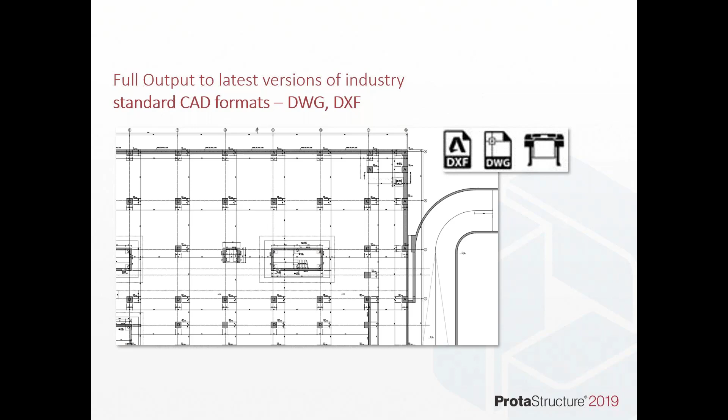Now, all of this can be sent out to your other preferred CAD platforms. So if you're working with AutoCAD or ZWCAD or a range of different other CAD tools, we can automatically provide and populate all the details out to those systems.

So the last thing I'm going to touch on today is Prota Steel. Once we've moved in and done the steel design, I'm now going to launch Prota Steel, and I'm going to take this model out into a Prota Steel platform. So the idea is that we've already done our design within Prota Structure, and we're now moving it into Prota Steel to perform the steel detailing.

Okay, so we're back in. I'm just going to quickly go in, and I just want to finish off the documentation of this. So to do that, let's just work with a few joints here. So previously, you saw that I designed this. I'm also going to, at this point, maybe also assign those purlin connections again. Let's just quickly come in and create those.

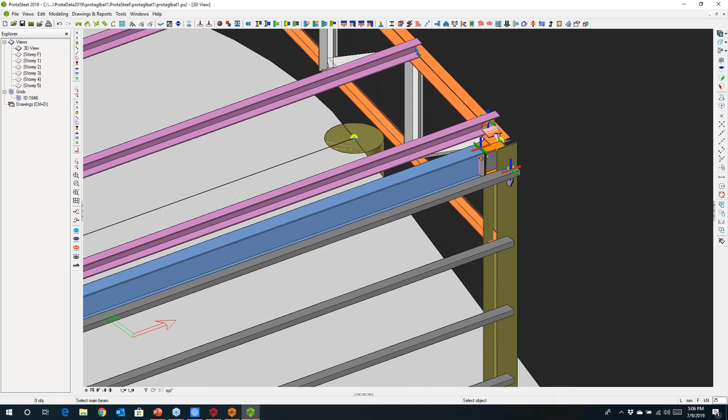Okay, at the same time I'm going to use IntelliConnect just to look at the design of this truss. So if I just select these elements, I can come into IntelliConnect, and I'm going to ask it to also systematically come in and design the truss joints there. So that's going through now and quickly creating those. You can see it's just moving across the truss there to create those joints. And then it will be done.

Okay, so they're done. And again, I can have a look at the model here. We can interrogate this, so you can see some of the truss connections that we've made there as well. We've introduced other macros that cover things that are a little bit more complicated. So if I have a connection at the top there, that's not the easiest connection in the world to make, and we can come in and set up more unusual macros.

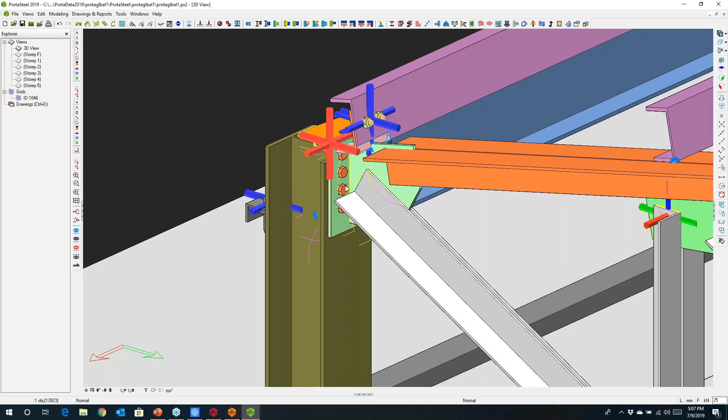Again, these can be edited, so I may just want to tweak the arrangements here. Maybe I want to play with the way in which they're set. So if I just apply that, you'll see I've just made some adjustments there. Maybe I want to make that a bit longer. Maybe make that, say, 5. So you can just apply these and set these up to suit. And you can see that they're done.

Now at this point in time, I want to move in to create my documentation. So in Prota Steel, we can come and select a joint, and we can apply what's called a detail manager to this joint. So I can call this one, say, truss 1. We can add this, and then we can choose objects that we might want to include within the detail here. So if I just right click, you'll see that there's a box created around this joint.

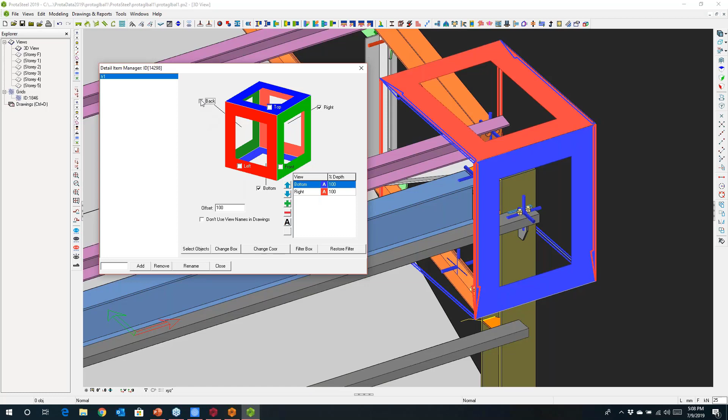Now think of this a little bit like a camera. So I'm going to take different photos of this joint. I may want to look at it end on. Maybe I'd like to look at it from the top downwards, and perhaps I'd like to look at it from the face looking forwards. You can even add a 3D view in here to look at different views through the joint. Now, once we've done this, we can actually come in and slice and dice the model however we like.

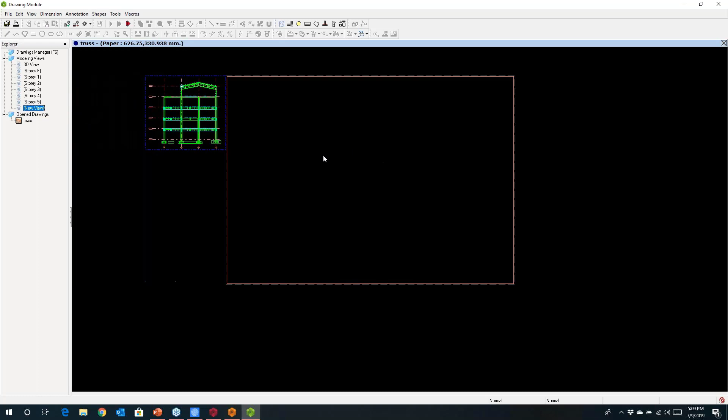So I'm going to create some views through the model. I'm going to choose to just create a quick view of this truss at that elevation, and you can see all the details here of that truss. I'm now going to move into my drawings, and I'm going to go to my drawing manager, and I'm going to create a new drawing. Let's just call this truss. And if I hit OK, you'll notice that those views were populated here, and I can bring these into the model. So you can see the view of that truss is provided here.

Okay, and you can see the elevation there. You can then start to annotate this. So if I would like to maybe at this point come in and add some dimensions to this truss, okay, these can be dimensioned up, okay, and we can create.

At the same time, you can see that that box that we created around the joint is also highlighting that connection there. And if we just click on this toolbar, same box at the top here, that then gets drawn out. So here we can see that all this connection is then documented out from the views that we've created.

Now these labels are dynamic, and you can move these around to reposition things. Perhaps you don't want it to clash with how you'd like your detailing to be done. Okay, all these labels are dynamic, and you can just reposition them within the model.

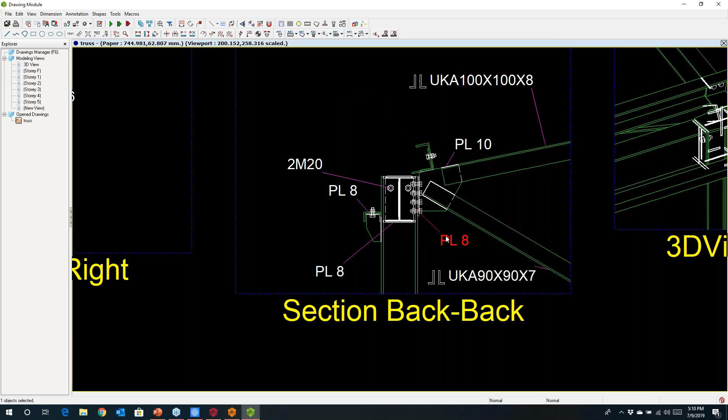I could do some further annotation here. Perhaps I'd like to, at this point, let's just maybe provide some dimensioning. Okay, so I can just annotate this up to suit the way in which I'd like the connection to be designed in detail. So that's the idea with Prota Structure.

Using IntelliConnect, we can connect the entire building together, and we can then produce all of our engineering drawings from here. By creating a fully connected model, at the same time, we're also able to completely produce shop detailing as well. Okay, so that kind of gives you an idea of how Prota Structure works and how the system works together to create one combined model.

Just to summarise at this point then, with the 2019 version of Prota, we've introduced IntelliConnect. It will automatically analyse all the joints within your structure, and it will try to make intelligent constructible connections work. It does cover a broad range of different connection types, so it's not just purlins and so on. Beam joints, truss connections, simple, welded, splice joints will all be automatically designed.

We can also add additional steelwork to complete the model. So if I wanted to introduce things like railings, stair rails, staircases, those types of additional steelwork can be added into the Prota model and all documented.

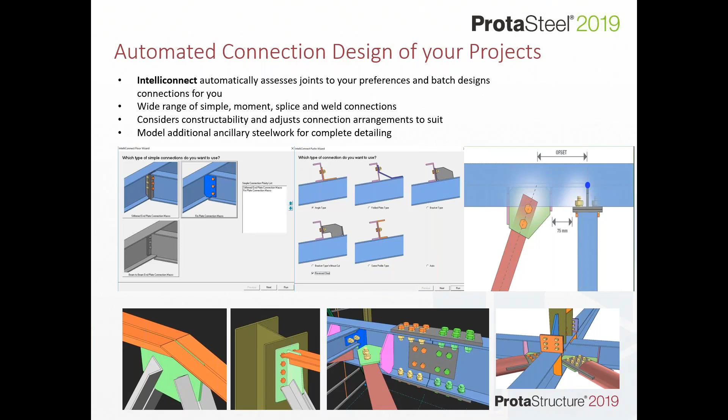You can set this up and customize it to suit your local company standards. So if you have for certain sections a certain type of detail that you'd like to use, whether it's pinned or fixed, or maybe you've got certain preferences for the number of bolts for certain types of connections, these can all be customized and standardized, and then you can apply those within Prota to get the type of detailing that you wish to have for certain types of projects.

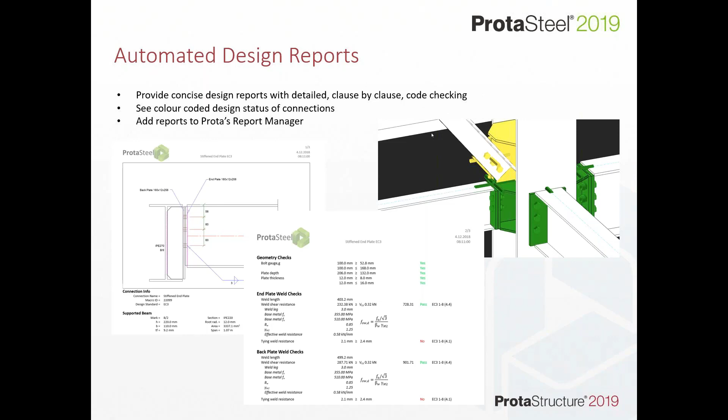All the documentation is produced, so very clearly you can see all the underlying checks in accordance with the code, and clause by clause code checking. We are progressively adding all the macros in there. We are progressively creating all the design documentation, and you'll see that list of full connection design being extended progressively during the course of this year.

Obviously, we're then creating all the detailed design, a detailed drawing output, and you can prepare them in different ways: plans, elevations, sections through connections, even 3D views can be created. And we also can go down to fabrication detailing. So if you want to see how components of those are detailed out, that can be easily done within the platform.

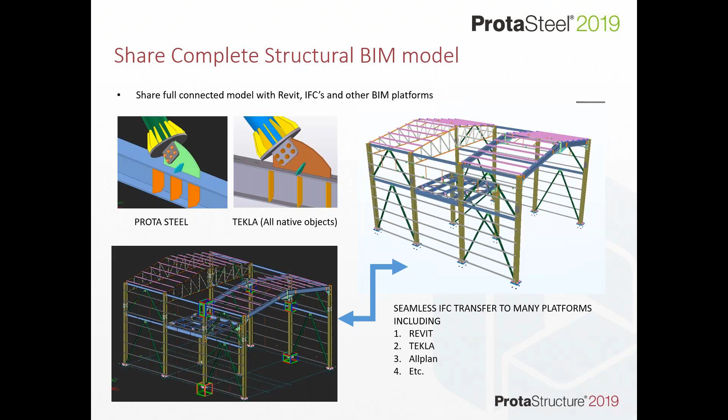Now, if you want to share information from Prota, we will send information out natively to systems like Tekla, Revit, Allplan. When you do send out to a system like Tekla, it's native, and it automatically links to macro objects that they have. But we expect that you really like Prota and you can use Prota fully by itself to produce all your steelwork detailing, right from engineering drawings through to shop drawings.

Final thing I'm going to touch on is how we communicate with other BIM platforms. And to do that, I'm just going to touch on a little presentation which may nicely summarize things today. What we've done earlier is work with physical objects to develop a model, and I've done that very quickly, and we've then designed that to our chosen codes of practice.

Now, once we've created that model, we can then move to document that, and we have two platforms: Prota Details for the concrete work and drafting, and that works natively in DWG and lays everything into your sheets. We also have ProtaSteel for your steelwork detailing and connection design.

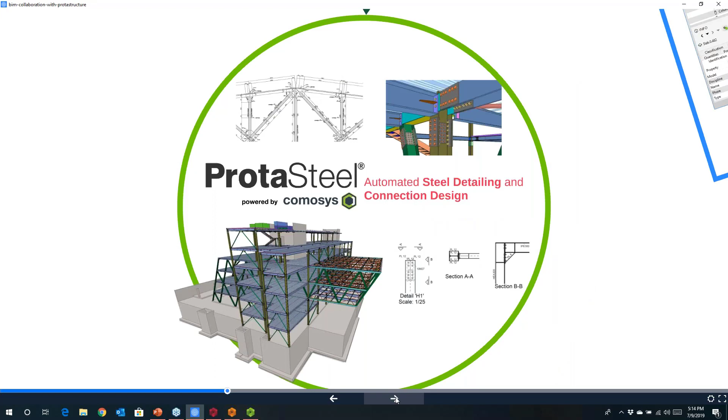Now, because we're working with physical objects, we can easily communicate these into other platforms. So if I'd like to share this with Revit or other BIM-related platforms, we have bidirectional integration with Revit. We can take models back and forward. All the physical information is shared: openings, drops, unusual layouts, all the offsets, everything will be automatically communicated directly into Revit. You can make changes in Revit.

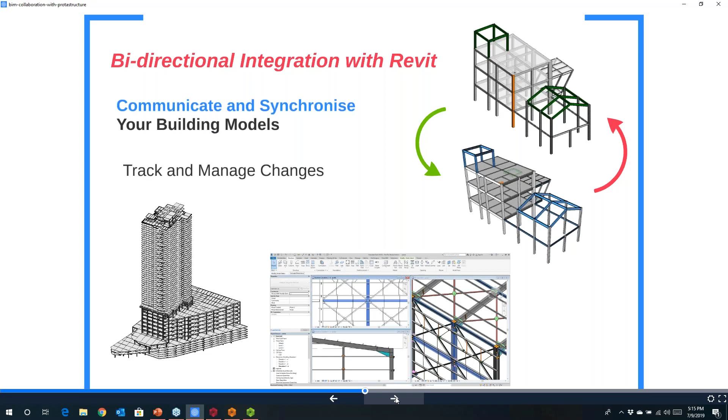Maybe you're getting together with the project team and coordinating the project. The changes can be made, and these can be communicated back into Prota. And you can perform this as many times as you like. Now, we do link with other platforms, so we have IFC links out to systems like ArchiCAD or Allplan. We also can natively link with Tekla Structures and ProSteel, and we can also create all of our NC files for fabrication detailing. And so this is where we pass data into the actual manufacturing process.

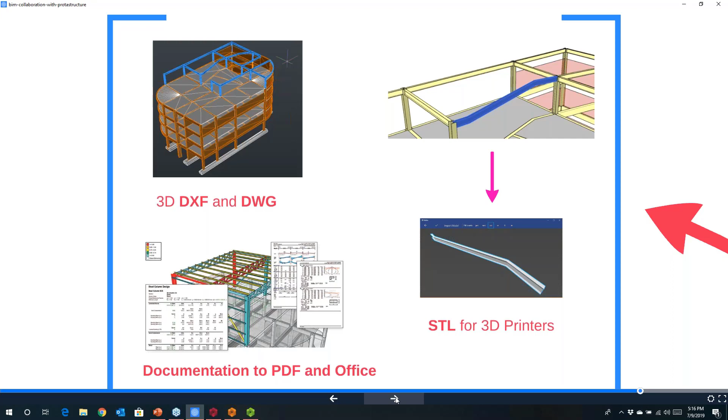And we're very open, so if you want to communicate models to other platforms like analysis platforms like ETABS or SAP, LUSAS, SAFE, all these can be easily done. Okay, we can also document other things in other ways. So if I want to create 3D DXF information, calculations, all these can be generated automatically from the model. All the documentation for submission, detailed calculation reports and so on is provided within the platform. So that gives you the overall view of how the Prota structural BIM system works, with a particular emphasis there on how we communicate with other BIM platforms.

So just to conclude, I hope you like what you have seen today. Obviously, I've gone through a lot of information very quickly and tried to cover as much ground as I can in the short time that we have today. We are continuing to invest significantly in new development work, and the 2019 version is a big step in the vision that we have for the software. We have very big development teams actively working on new technology at present, which we're going to continue to deliver over what is going to be an exciting period over the next years to come.